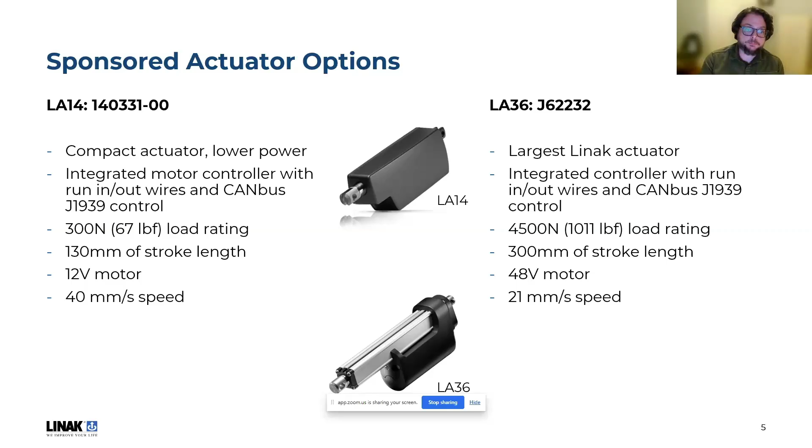One of the things we love is the introduction of CAN, being able to communicate this way. Of course, you can run these actuators as strictly manual in and out by providing power on the brown and blue cables, and signals on the red and black. But by introducing CAN, it unlocks a lot of features for positioning and feedback control that our customers find extremely useful.

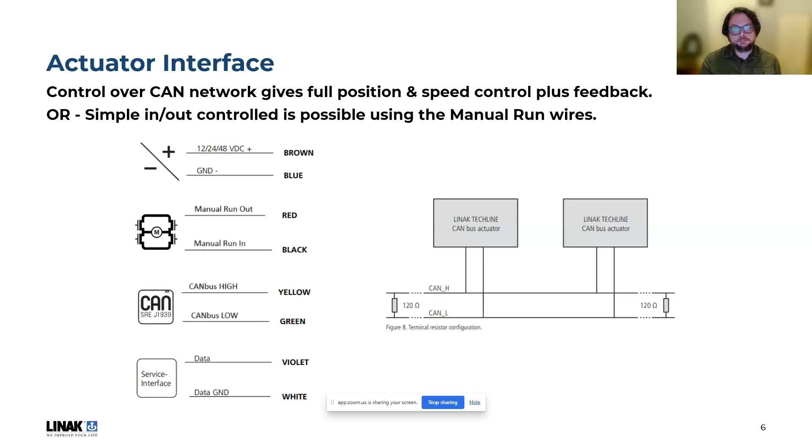Some of the things that you're going to get from us, obviously, data sheets, step files. We have our own manual on CAN bus specific to our product, which tells you all of the types of commands that the actuator can understand.

The LA14 actuator is going to be able to ship earlier than the LA36s, sometime mid-November. The LA36s will be available to ship at the beginning of January. We have a total of 15 each for any teams to use, available on a first come, first served basis. For logistics purposes, we are extending these only to teams in North America.

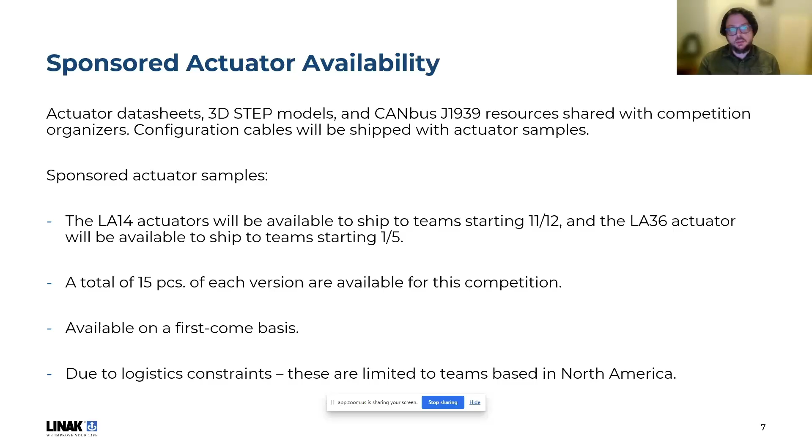Really quick example. I'm sure you can tell by the color which customer this is, but this is basically a grain tube unloading spout application, something we typically see great value for our product. This sits 20, 30 feet from the operator, 30 feet up in the air, not exactly the kind of place you want to get to when you're in the middle of a field. This actuator allows the operator to articulate the end of this grain tube as they're going without having to make any exits from the vehicle or do any manual work.

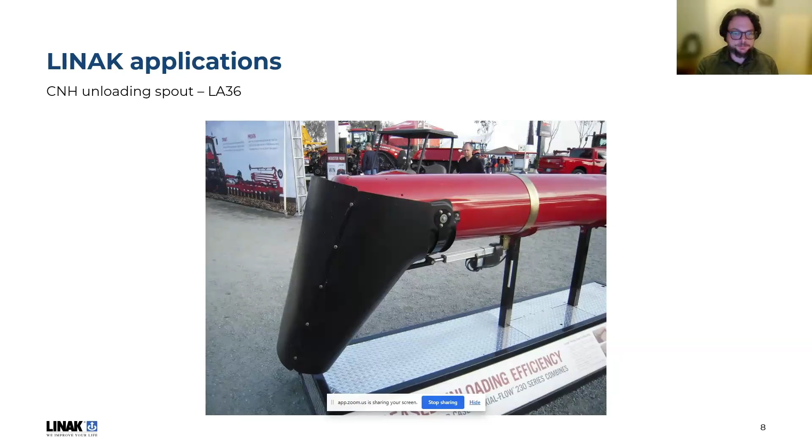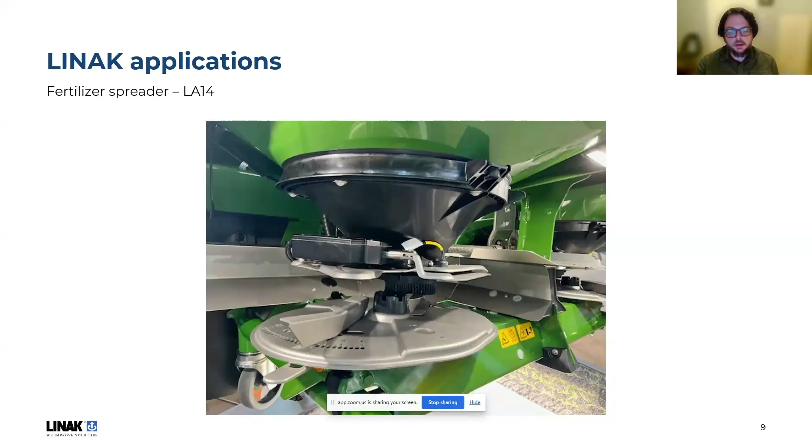In the next slide, what we're looking at - it's a little harder to see, but in the middle, that's our LA14 sitting horizontal on a fertilizer spreader application. It allows, again for safety purposes, much easier to push a button and have the actuator do the dangerous work of adjusting position and gate openings around moving equipment.

Another example of a fertilizer spreader and how the LA12 can be used to make the kind of adjustments that in the past would have done manually or with the help of hydraulics.

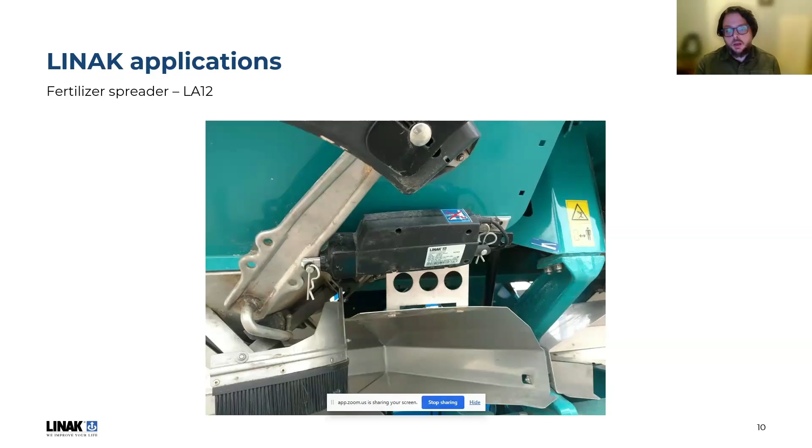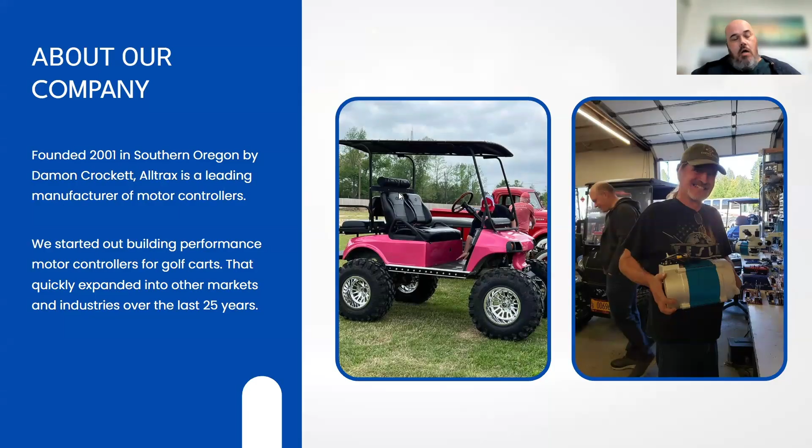Like I said, we started off in golf cars and have moved into all sorts of other industries, which we'll touch on here real quick. Over the last 25 years, we've built over 250,000 controllers. We sell into about 24 different countries, and currently we have about 17 active OEMs that we sell our controllers into for different applications. We've got go-karts, hydraulics, golf cars, all sorts of nifty products and industries that our controllers go into.

Our goal was to make the best motor controller on the market. Being biased, we think we hit that mark. We wanted to create a flexible platform that would allow the controller to work on pretty much any application with really little to no modification. You just connect what you want, program it, and then it makes the wheels move. The other thing we really wanted to do was have world-class support and quality, and prove that a U.S. manufacturer can compete with anybody. All of our engineering is in-house, we manufacture everything in-house, our support's in-house, and we do all that from our two facilities just outside of Grants Pass, Oregon.

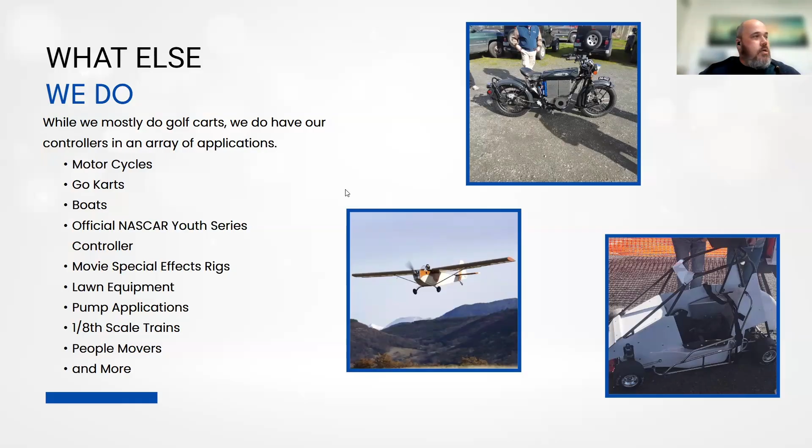We've also had a lot of stuff in TVs and movies. Mythbusters used our stuff quite a bit. The Death Mower, if anybody's familiar with that, used 3 of our controllers. Colin Furze on YouTube, one of the big science maker channels, has used our controllers a few times. We've been in commercials and movies in the past, like the Italian Job, where they created a whole bunch of electric Minis with our controllers for a subway chase scene because they couldn't use gas cars.

But really, at the end of the day, what we really like to do is go fast and do dumb things. And this is kind of where we are. We build our stuff robust to handle being submerged or popping a wheelie on a golf cart. We really cut our teeth on really extreme environments. I wish I had a picture of it, but the first hybrid electric snowmobile on a big glacier, the Jacobson Glacier in Greenland, where it's typically -40, used one of our controllers. So we've been all over the place.

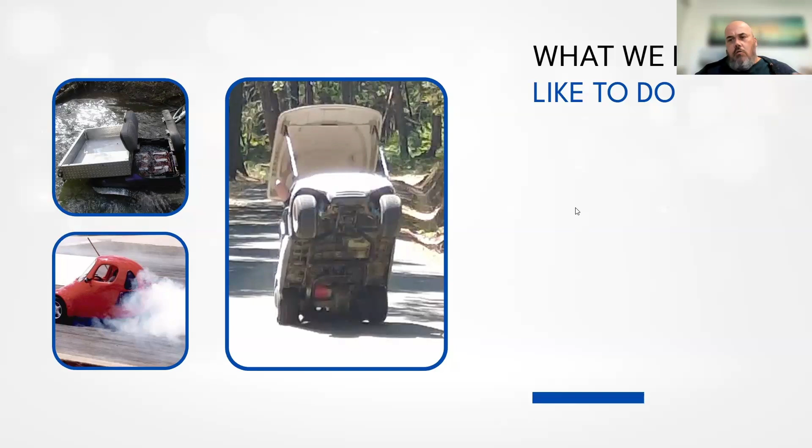Now we'll get into what we actually do. For this competition, we've got our AC controller, which is a three-phase AC controller that will do induction and PMAC motors. And if a motor is something else you need, we've got some 5.5 and 4.5 kilowatt induction motors. The combination of these two things, even just one of them, will move pretty much anything. If you need more power on wheels, on more wheels, we've got that ability also.

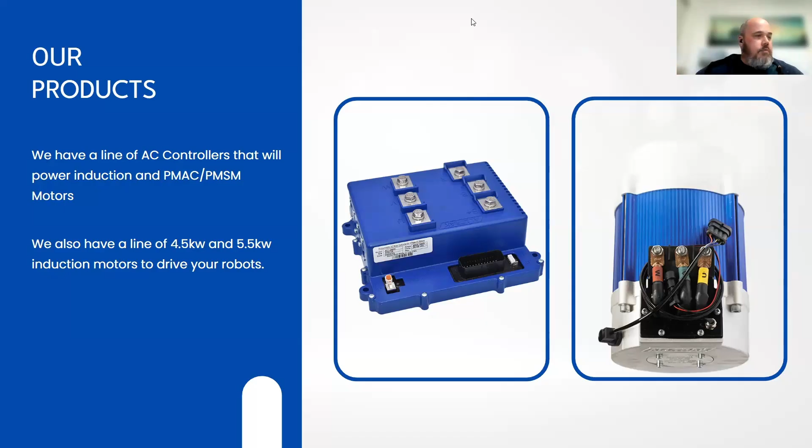So this is our AC1. It's 24 to 72 volts. You can run it up to about 90, but don't run it any higher than that. It does 650 amps for 2 minutes and about 350 amps continuous when there's airflow. It uses an active cooling setup, so it needs a bit of airflow. But the controller is potted, so you don't have to worry about debris, water, or chemicals getting into it.

There's two available options. One has a 23 pin and a 35 pin amp seal connector. The big difference is whether or not the temp sensor and the motor sensors are built into the wire harness or separate. The 23 pin is the separate one.

All the controllers use an ARM processor with an RTOS on it, which allows us to do a lot of watchdog functions. So we can catch a lot of issues long before they happen. Depending on what the alarm is, we either go into a limp mode or shut down, and the controller will tell you what alarm it is.

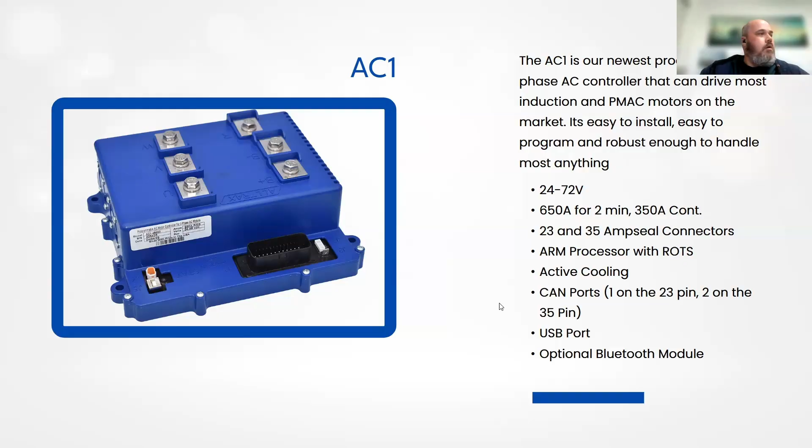So a couple things that we've got: our controllers are capable of primary and secondary operation. The controllers themselves can do one primary and one secondary, so you can have four-wheel drive, tank steer, a motor in the front and a motor in the back, and they can run. They communicate over CAN and share torque information and speed information, so you get a really smooth drive on the system. You don't have to worry about the front and the back fighting each other. We've really dialed in that ability for them to work together and operate at the same torque and RPM.

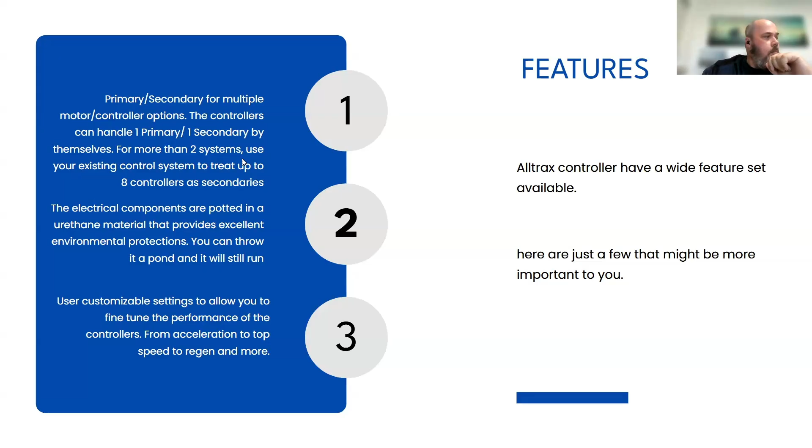If you're using an onboard control board that's handling all the communications, you can then use up to 8 controllers and motors as secondaries, and basically the primary would be your motherboard on your machine. So you can run up to 8 individual wheels or axles, whatever you need to do.

All of our components are potted into urethane, so it's basically waterproof and environmental proof. You could take that sucker and chuck it in a pond, as long as your wires were long enough, and it would run all day long underwater in the nastiest pond. We've done all sorts of torture testing to it, and short of a bullet, really, it's not going to affect what it can do. It'll run underwater, run in ice, hot, dusty, you name it.

And the big feature that we really like to push is that it's customizable. You can go in and set how you want it to perform, down to pretty much the smallest detail, how you want it to run.

And it's got profiles. It's got 3 profile settings on it, so you can have 3 different run modes. So you can have something like it's a little faster going to the field, and then once you're in the field, it clicks over to another profile.

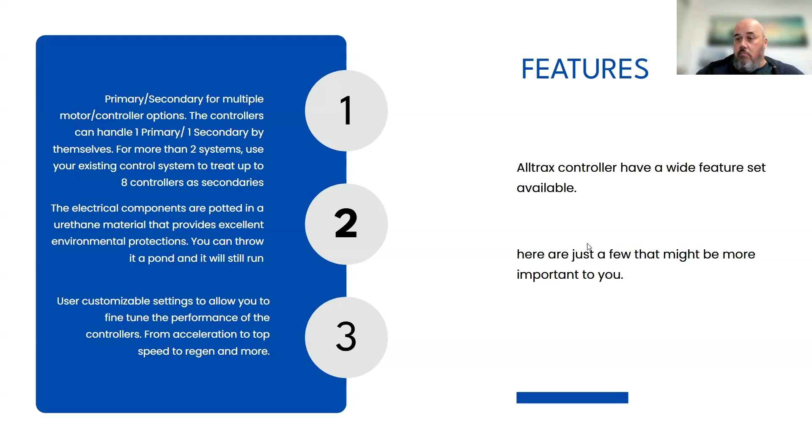The controller operates on CAN. We're in the process of getting J1939 going on it. Right now we're running our own Alltrax CAN, so anybody that uses our stuff will provide you with the CAN messages. Once J1939 is fully implemented, we'll issue a software patch, and then you can use your standard J1939 commands.

We've also got motors. Like I said, we've got a 4.5 and a 5.5 kilowatt. It's available with the 56C frame and the 7/8 keyed shaft, so anybody who uses something like a Motenergy motor, same face, same shaft.

Max RPM is technically 10,000. If anybody needs to run it more than 10,000 on a farm, you're doing something wrong, but it is capable of out to 10 to 13,000 RPM.

The 5.5 kilowatt will do 150 Newton meters at 1,000 RPM. So torque is not an issue with this motor.

Again, it's got max 21 horsepower, and we'll do peak 50 kilowatts for about 5 seconds, then do 4.5 or 5.5 pretty much continuously. S2-60, so for about 60 minutes it'll run it at its rating. So you got a lot of runtime with a lot of power.

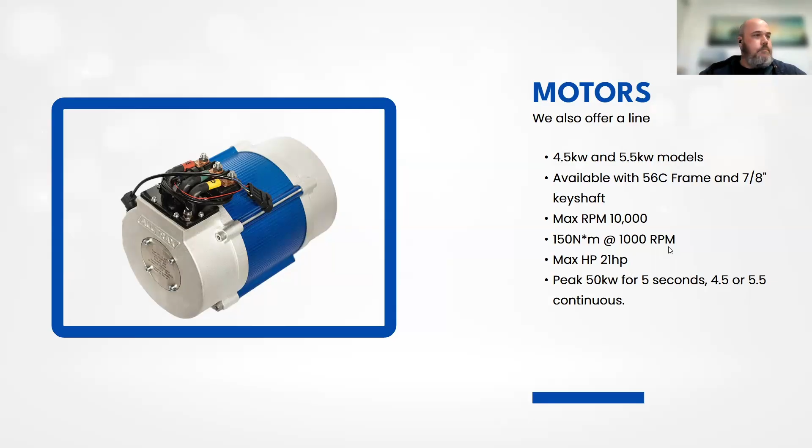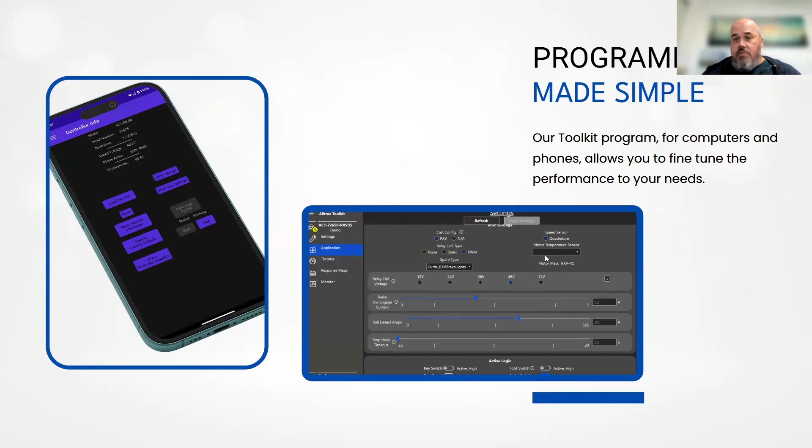Again, the programming, you can either do it by computer via USB, or you can use your phone and Bluetooth. The program is the same between both of them, so if you use one, you can easily switch to the other with almost no issue because everything's the same, everything's laid out very similar.

So that is what we do. We're planning, we haven't decided on how many kits we're going to offer up. It will be first come, first serve. We'll probably limit it to about 10 kits, so if you need to do multiples, you can do 2 or 3 of them. And again, they'll be first come, first serve.